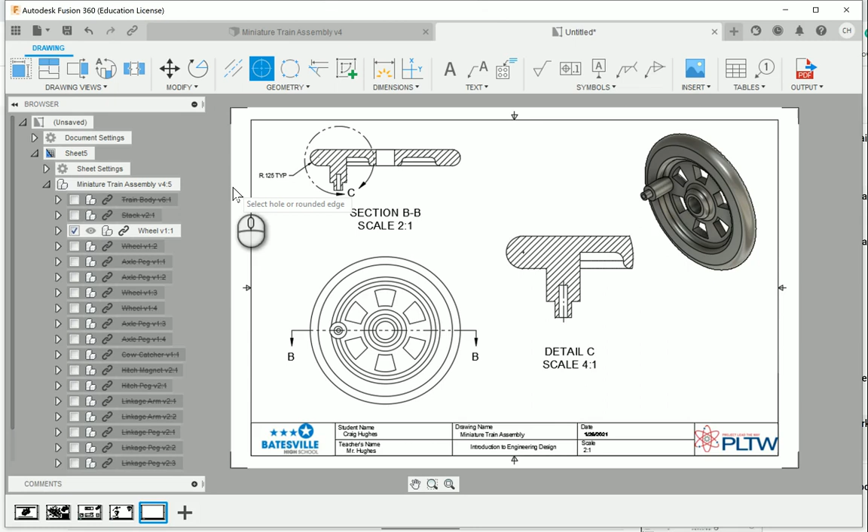In this video, we're going to create and set up the drawing for the axle peg. To get started, we're going to add a new sheet to our drawing set. I will create a base view.

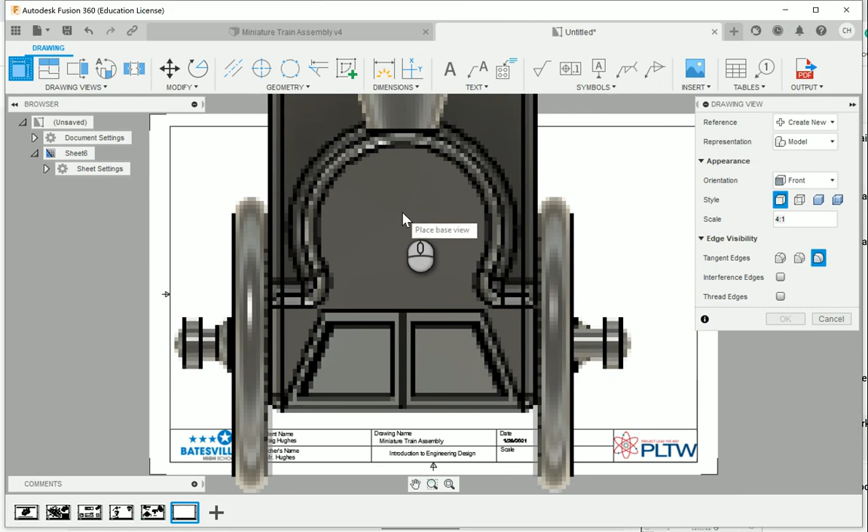From here, I'm going to look at creating a proper view for our axle peg. In order to do so, I am going to bump the scale up. The axle peg's a little smaller than some of the other parts, so maybe we try a 4:1 scale. And I'm going to go ahead and click to place and say OK.

Finding the first axle peg that shows up, right clicking and suppressing all that's selected. So here's our axle peg drawing, so I'm going to double click on the view. The other thing we can take a look at is what kind of orientation would be the best for our part.

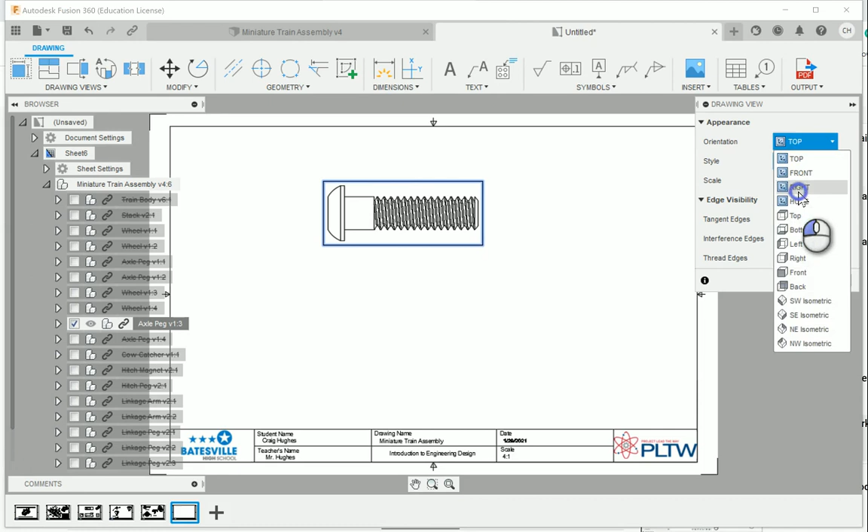In this scenario, if you cannot get the proper orientation, as I'm clicking through the different views, it's going to be a little difficult to try to get that. So actually what I'm going to do is choose the right side view, which is going to show the top part of our axle peg, and I'll say close.

Let me turn on the tangent edges here. Actually, we don't want the top or the right side. Let's do the left. There we go. So I want to see that hex shape that's showing up. So this would be the left side in this scenario.

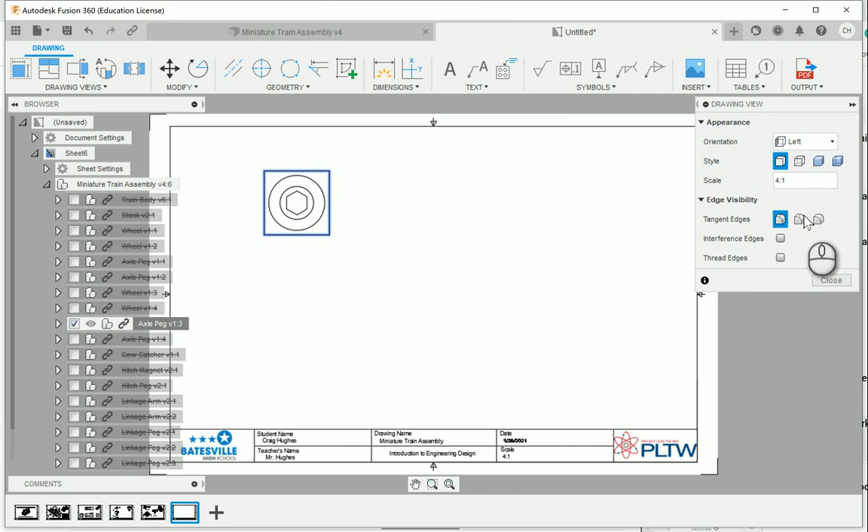With the assembly, some of the directions are a little different. I'm going to go ahead and choose projected view, selecting that top view, and I'm going to place this view right here. Let's go ahead and place it, and I'm going to say OK.

And from the front view now, we can select to project an isometric view. So I just select projected view, selecting that, and going from there.

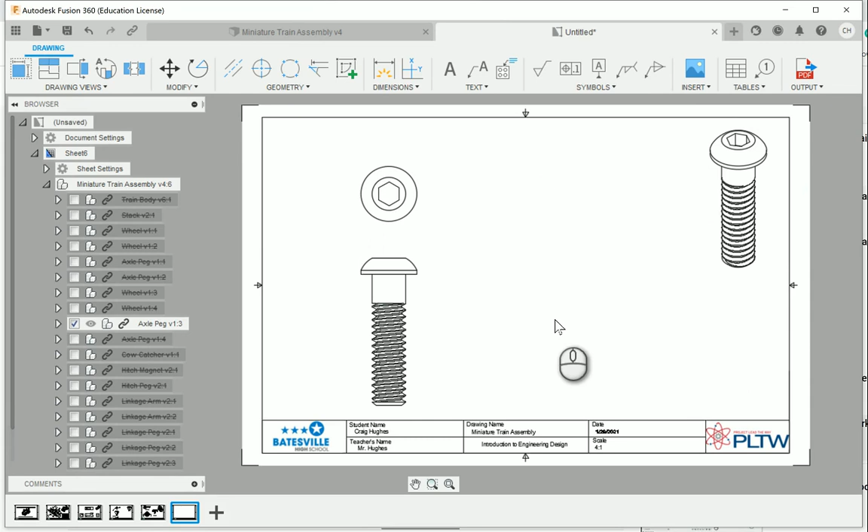As far as this drawing goes, we will provide a detail view. So for the top part, I'm going to zoom in here, and I'm going to go ahead and just blow up the detailing on the hex portion of it. So I'm going to set this circle right here in the center, and we're going to place the detail view right here.

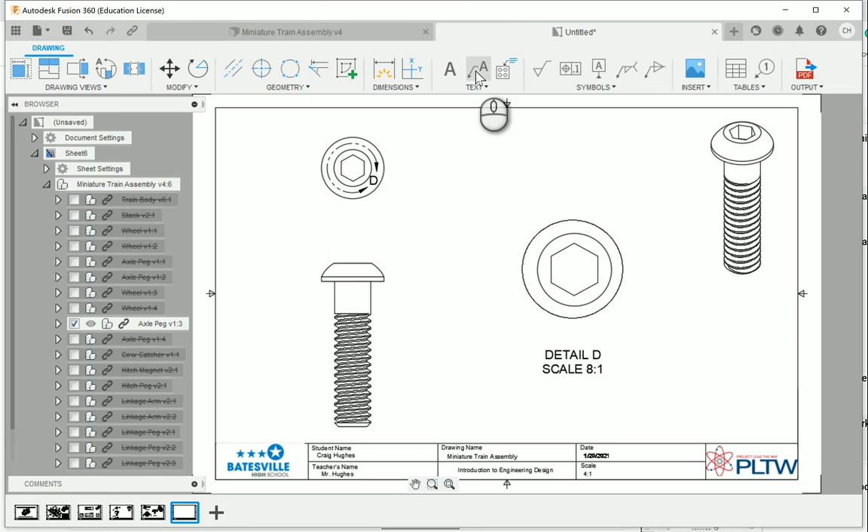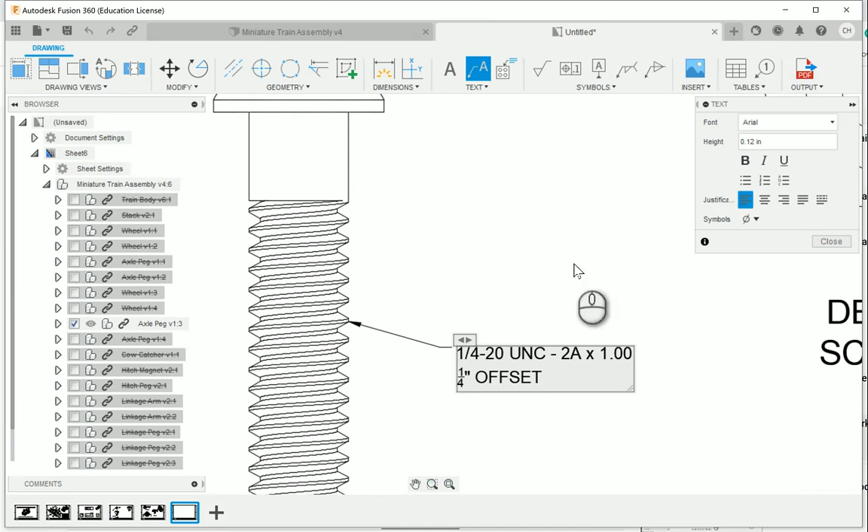As far as any of the notes that you see, we will end up utilizing the note tool. So for example, for the threading, you can always select one of the outside edges, and then from here it's a matter of just typing in what details that you had for the note, and placing that in. Same thing as far as the chamfer note at the bottom, and then also for the hex head as well, providing any of the center marks needed as well for the part is going to be important.

For the views, you will want to double click and set in the hidden lines, so that way we can kind of see the depth of that hex head being shown, and there you'll end up seeing that.

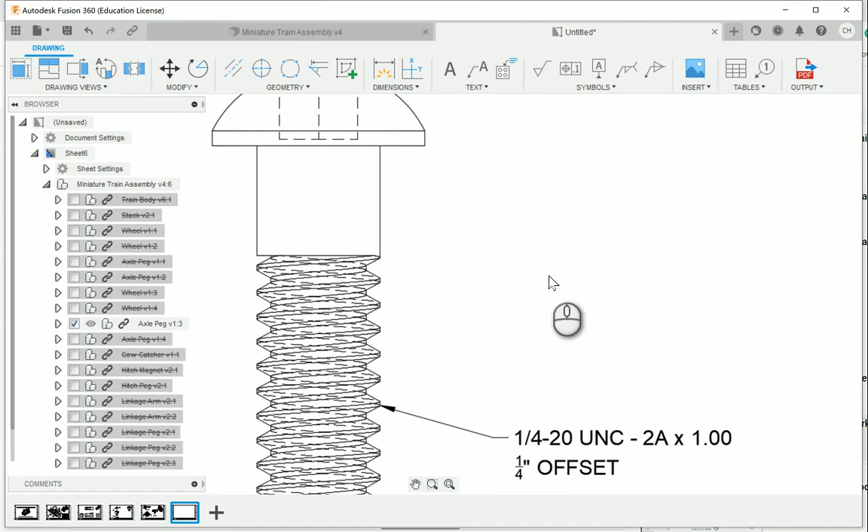So this sets up the axle peg drawing. Pretty simple drawing since you've done some of the others. The isometric view we will set as a shaded view to be able to show that detailing for this part. But the rest is up to you as far as dimensioning and having the proper notation being provided to fully detail and document this part.

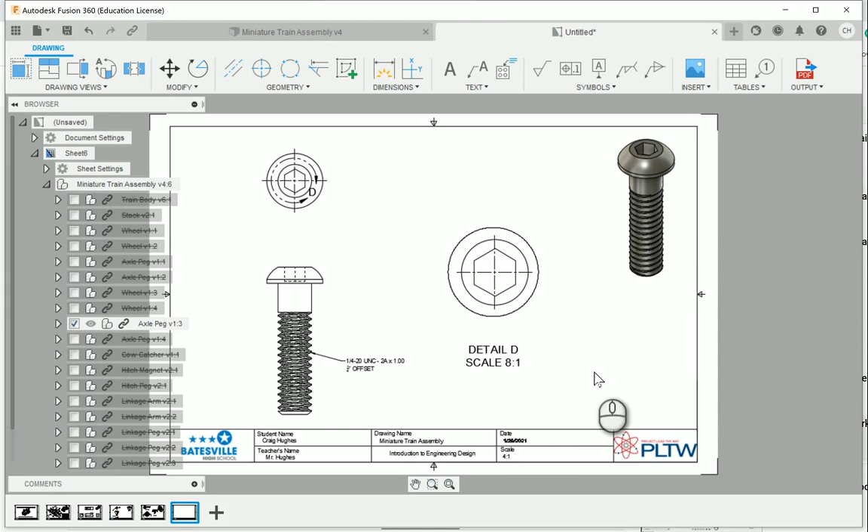Check the next drawing for the cow catcher and seeing what kind of details we need to provide for it.